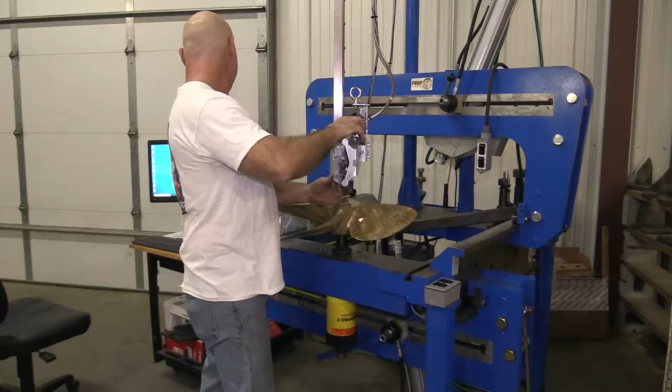Most of your propellers, when they come out, are class 3. When we repair your prop, if not requested otherwise, we will repair it to a class 2, which is one step better than new. So your propellers will always leave our shop better than new. If you want that 15% better fuel economy in your boat, we can go to a class 1 or S class. And that's at request, and of course it takes more time, so it is an additional charge, but it is well worth it.

Your boat will run smoother and farther. Less wear and tear in your drivetrain. A lot of your boat manufacturers are even requiring it, at least for your first set of props, to maintain the warranty. This machine here is one of 13 in the world. We brought this technology to Lake of the Ozarks, and you might have come close somewhere, but you can't get any better anywhere else. And that makes me happy.

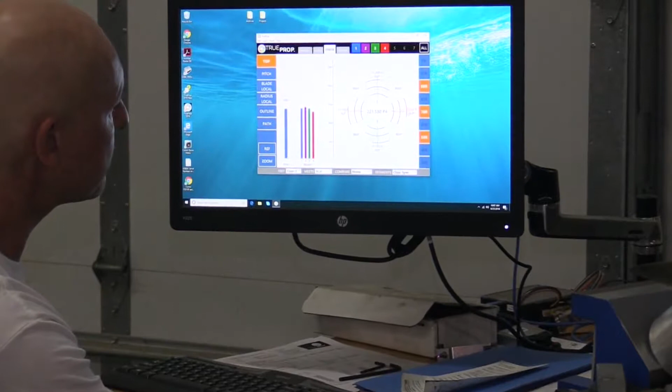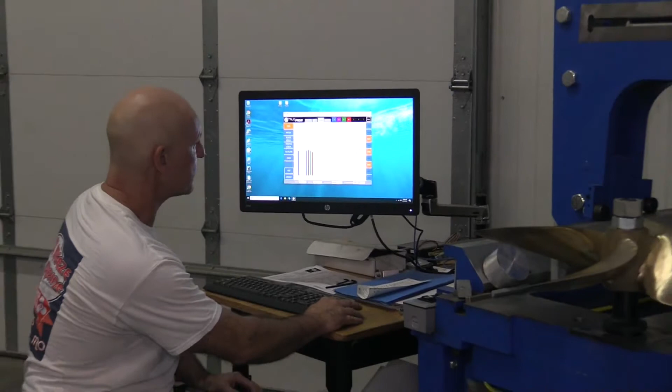This propeller is a 22 by 22. You can see each blade is a little bit off. 21.5, 21.2, 21.5, 21.7. So they're really close. Spacing between the blades, if it's a 4 blade, there would be 90 degrees between each blade. You can see that's got 90, 90.4, 89.6, and 90. Doesn't get much closer than that.

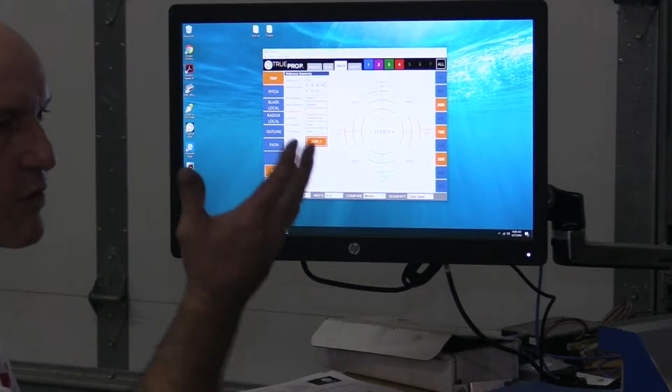Compare every blade to every other blade. It's another thing about this system. Instead of just telling you what one blade is, it actually takes an average of all the blades. So everybody's working together in the end. Okay, we want this to be a 22 by 22. It's telling me where my problems are and what would be causing the shake in this when this blade's running down the lake. These areas are out.

It meets a class 3. So straight from a propeller manufacturer in the box, this is what you'd get. And we will turn it into a class 2. The customer hasn't requested anything except get rid of the shake and just make it better than it was. So we're going to make it a class 2 and return it to him. And it'll perform better. He'll get about 5% better fuel economy just by going from a 3 to a 2.

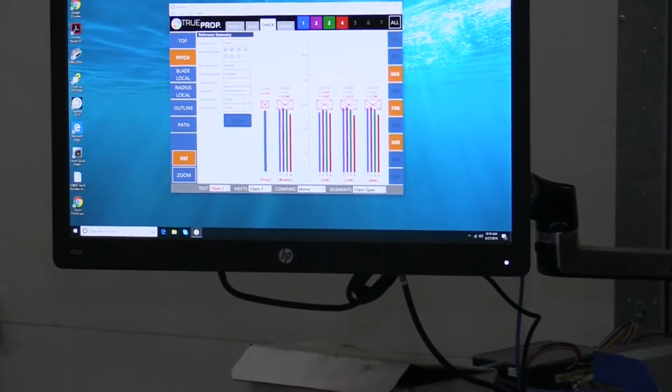We can actually see the pitch in a class 3, or these are class 2 boxes. If it was a class 3, those boxes would get bigger. Those boxes are only really like the size of a hair. So we check a class 3, the boxes get bigger. So it's permissible. That's each blade, how far each blade is apart. This one's pretty low on pitch, that's the highest on pitch. Go back to a class 2, it fails.

Shows me in my local blade which blade I got, 1, 2, or 3. Let's get bigger. The black line is where the blade should be. The green line is where the blade is. We have to make that green line lay on top of that black line, to put it simple. That's a little better view of that.

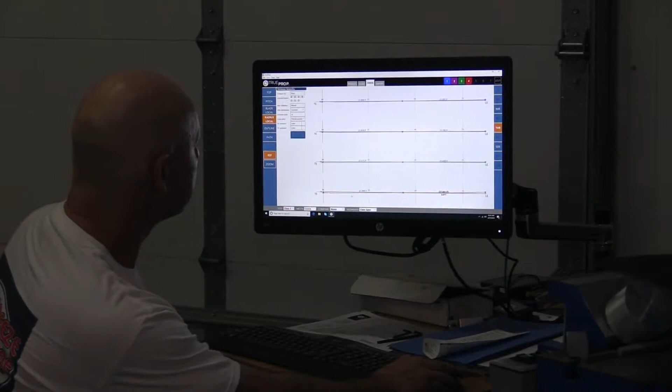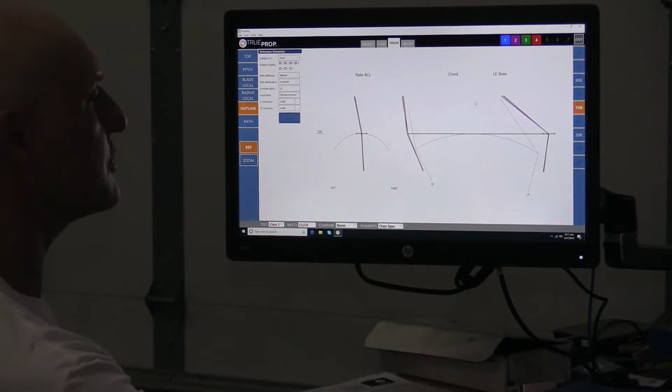Our blade outline. That's how each blade tracks in space. As you can see, they're not following each other 100% right here. And that is okay for class 3, but not for class 2. This is every single blade laid in line. If they took every single blade and just cut them off and laid them on top of each other, that's how they're laying.

You can see that they're in a class 3, which is fine. If we were to go to S class or class 2, these goalposts would get smaller and smaller and make you fit them in. And that's pretty basic how that works.

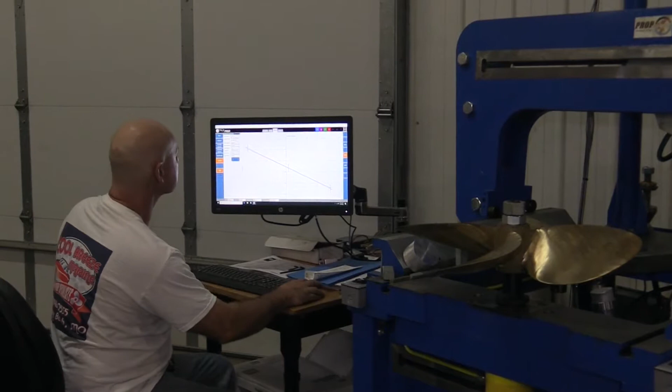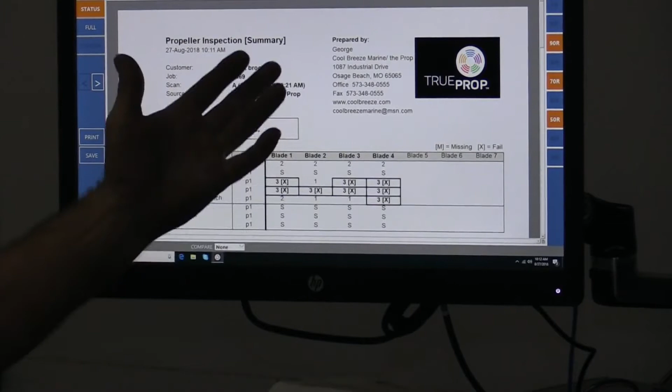And then after that, I can print a report. It tells me that a lot of the blades are actually where they're supposed to be in S class. These are the parts that are out. They're in a class 3. I can get a 5-page report on this. It says a lot of things that no one understands. So the 2-page report is what the person's going to get, which is that.

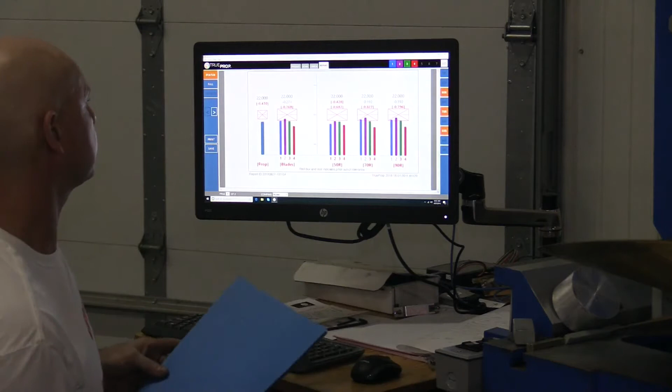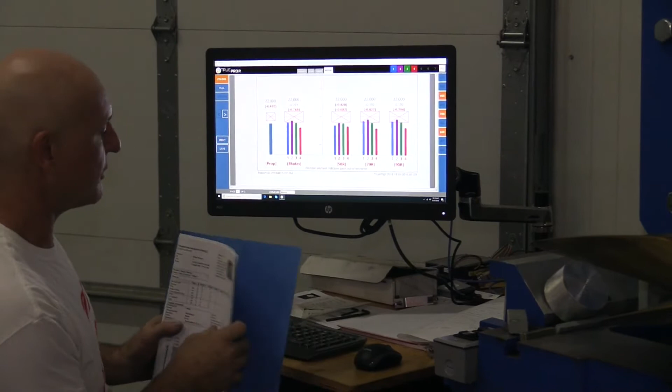And what it will show is everything laying in a box, when actually it should look like that. And it will tell you pass or fail. It's like a mean teacher. It will not give you any leeway, and it will not pass you for any other reason than you did the work.

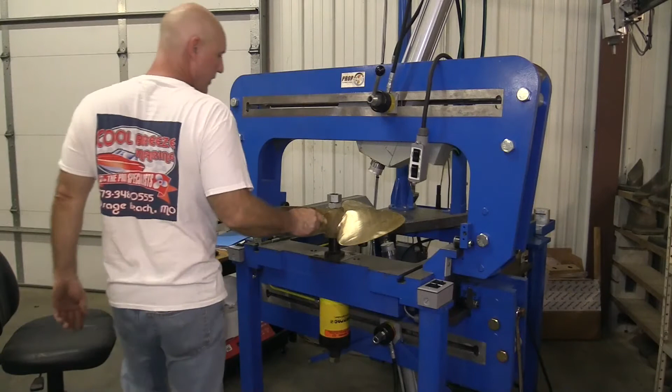If we wanted to bend these blades, which I'm not going to do right now because we're just making a movie, I can lock this down. If I really had to, I could beat this thing out here with a sledgehammer and it would not affect this machinery whatsoever. Cannot move it. The other lock locks the arms in place.

If I want to, say, change the pitch on this, I would pull this in, put one ram under here to push this up, put this ram here to push that down, and I can actually twist that whole blade. We just did a set, we did about 2.5 pitch on that thing without even breaking a sweat. This thing will apply up to 6,000 pounds of pressure, and accurately.

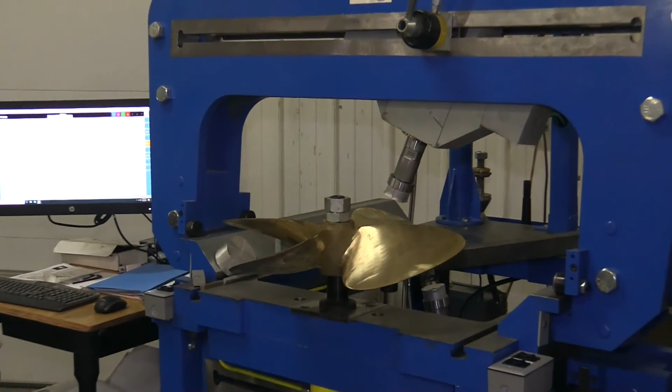I could do up to 7 blades overlapping. We have overlap bars that will reach in and under and do the bending where a hammer could never go. And once again, all without heat. You get a better prop back than you brought in. Even if you bring it brand new, I can give you a better prop back. And nowhere else can you get this done, especially at Lake of the Ozarks.